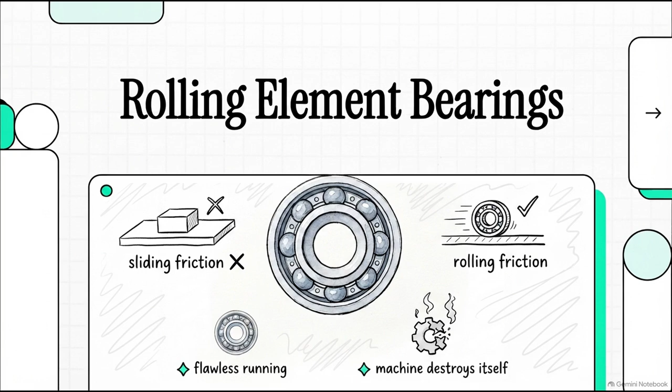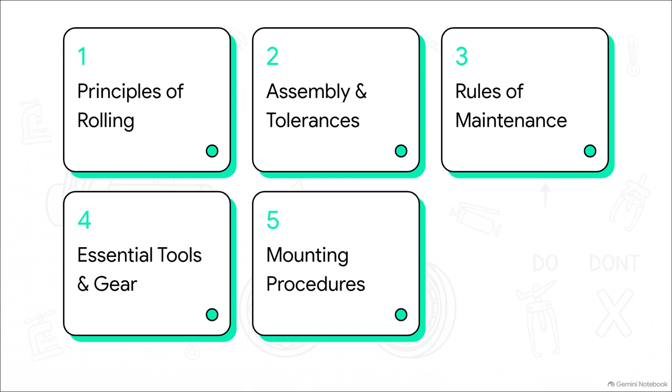Here's our roadmap for the session. We're going to breeze through the principles of rolling contact, move on to assembly design and tolerances, hit the strict rules of maintenance, look at essential tools and gear, and wrap it all up with precision mounting procedures.

Section 1. Principles of rolling contact. Let's look at the core concept here, swapping out that old sliding action for rolling elements. Now, unlike sliding mechanisms, these bearings stick a series of rolling elements, your balls or rollers, right between two moving surfaces. And because we're rolling instead of sliding, the material requirements completely change. The elements and the raceways they travel in absolutely must be made of specially hardened steel. Why? Well, the harder the elements, the less the surface deforms, which drastically cuts down frictional resistance.

But here's the real kicker. That hardened steel is crucial because the actual contact areas are incredibly tiny. I mean, think about it. With ball bearings, all those forces are concentrated on a microscopic point of contact. With roller bearings, it's focused along a very thin line. And because that load is squashed into such a minuscule space, the lubricant that gets dragged into the contact area is put under immensely high pressure. Surprisingly, this actually forces the viscosity of the lubricant to spike, massively increasing its load-carrying capacity exactly when and where it's needed most.

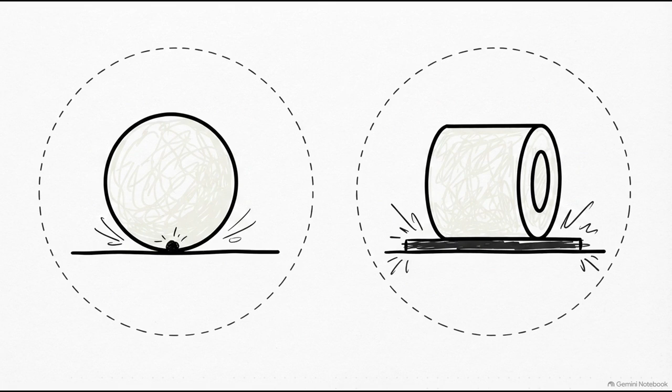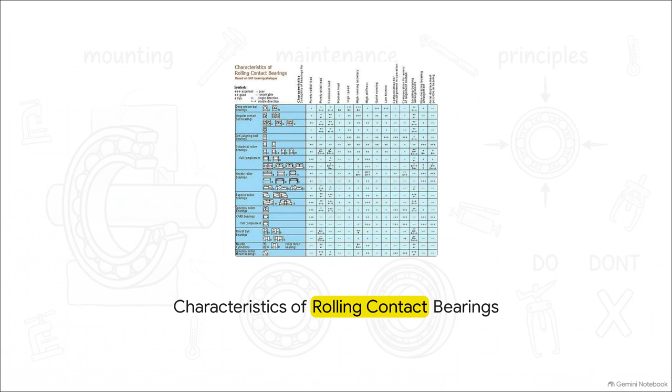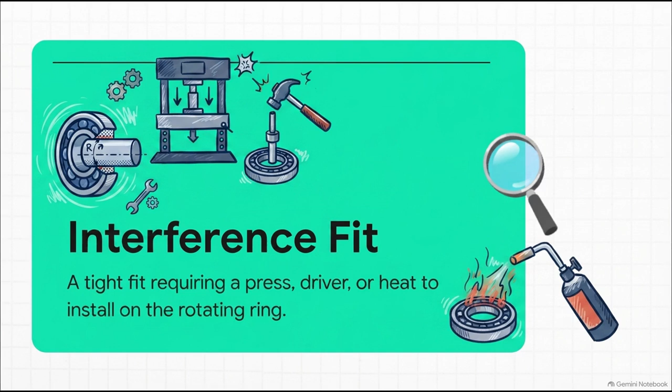Moving on to Section 2, Assembly Design and Tolerances. So how on earth do we keep a bearing perfectly locked onto a spinning shaft without completely crushing it? The main trick we use to secure a bearing is an interference fit. And let me tell you, this is a seriously tight fit. You can't just push it on by hand. You're going to need a press, a driver, or some thermal expansion through heating to get it installed. As a golden rule in mechanical design, the rotating ring of the bearing, which is usually the inner ring on the shaft, gets this interference fit. This ensures it stays completely locked in place while it's spinning under heavy load.

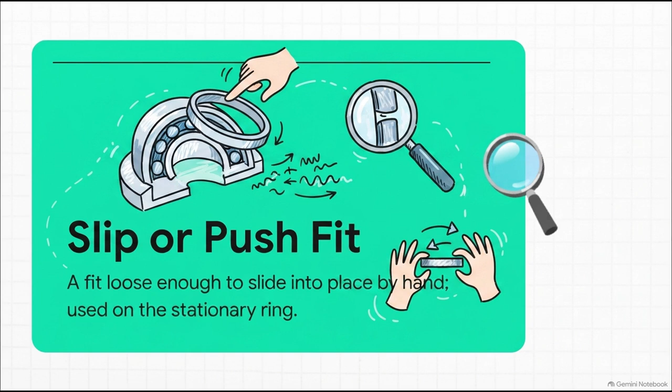On the flip side, we have the slip or push fit. Just like it sounds, this fit is loose enough that you can literally just slide it into place with your hands. We typically use this on the stationary ring of the bearing, which is mostly the outer ring sitting inside the housing. Not only does this make assembly way easier, but crucially, it allows the bearing to make those tiny, microscopic adjustments during operation. And that floating setup solves a massive real-world physics headache: thermal expansion.

Look, when machines run, they get hot. And when metal gets hot, it expands. If you've got a rotating shaft held by two bearings and both of them are locked down completely tight, well, the thermal expansion of the shaft is going to physically crush those bearings. No way around it. So the assembly has to be designed with one bearing securely held in its housing, whilst the other is left floating as a non-locating bearing. That way, it can move just a fraction to absorb all that axial growth.

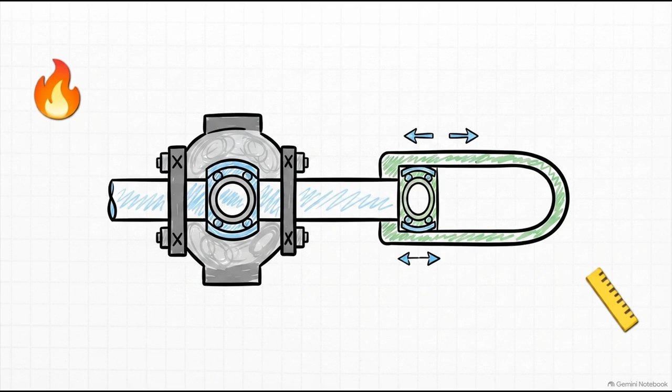To keep everything in its exact axial position on the shaft, we rely on some specific mechanical locking devices. The most common setup you'll see for both single and double row radial bearings is a specially designed shaft nut paired up with a locking tab washer. Now, for parts like the inner cones of tapered roller bearings, you'll often spot a slotted or castle nut secured with a split pin. Basically, these devices are there to guarantee that all the vibration and rotation doesn't cause the bearing to just wander out of position.

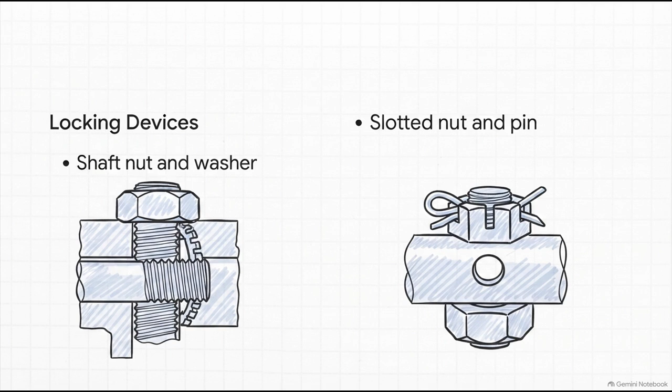Okay, Section 3. Strict rules of maintenance, because, let's be honest, all that brilliant engineering we just talked about can be entirely ruined by one simple human error. When you are handling rolling element bearings, you genuinely need to adopt a surgical level of cleanliness. We're talking completely free of dust and dirt particles at all times. You've got to handle them with strictly clean, dry hands or fresh gloves. Not using them right away? Wrap them up in oil-proof paper. And please, don't use dirty cotton waste to clean them. Stick to clean solvents and lint-free rags.

Oh, and here's perhaps the most common fatal mistake. Never ever spin a dry, unlubricated bearing with compressed air. Doing that can cause instant scoring. You'll literally ruin the component before it even makes it onto the machine.

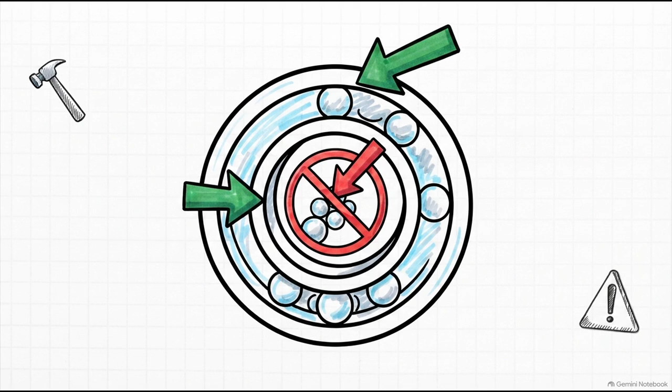This brings us to a massive, absolute rule. We call it the force rule. Whenever you're mounting or dismounting a bearing, the physical force must always be applied to the ring with the interference fit. Never, under any circumstances, apply force in a way that transmits through the balls or rollers themselves.

If you smack a bearing directly with a hammer or force the outer ring to try and push the inner ring onto a tight shaft, those rolling elements will physically indent the hardened steel raceways. It's irreversible damage. Game over.

Right. Section 4. Essential tools and gear. Because of that strict force rule we just discussed, raw human power just isn't going to cut it. You absolutely need specialized mechanical gear to handle these components safely. For installation, an arbor press is heavily preferred. It gives you that brutal yet perfectly even and controlled force you need for tight fits.

For removal, bearing pullers like claw pullers are completely essential. Just make sure the claws of your pullers are free from burrs and kept in top condition so they grip smoothly. Oh, and you'll definitely need lifting gear and slings for the really large, heavy bearings, along with specialized hook and impact spanners for any adapter sleeve nuts.

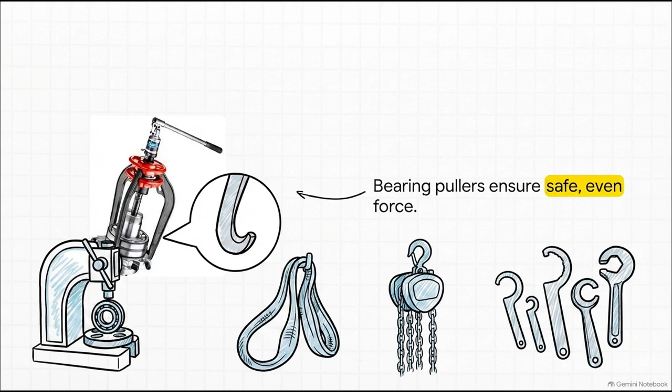Sometimes a fit is just too tight for a cold press, so we have to use thermal expansion. Now, traditionally, engineers used to dunk bearings in a hot oil bath. But these days, modern induction heaters are the gold standard. They use electromagnetic induction to heat the metal super rapidly. They're massively cleaner, way easier to use, and they completely eliminate the risk of contaminating your pristine bearing with dirty oil before it even goes into the housing.

And finally, Section 5, Precision Mounting Procedures. This is where all the theory, the tolerances, and the specialized tools finally come together. For smaller bearings, so generally anything with a bore of 100 millimeters or less, we go with a cold mounting procedure. Step 1 is always a meticulous inspection of the housing and shaft. You're looking for absolutely any burrs, nicks, or scratches.

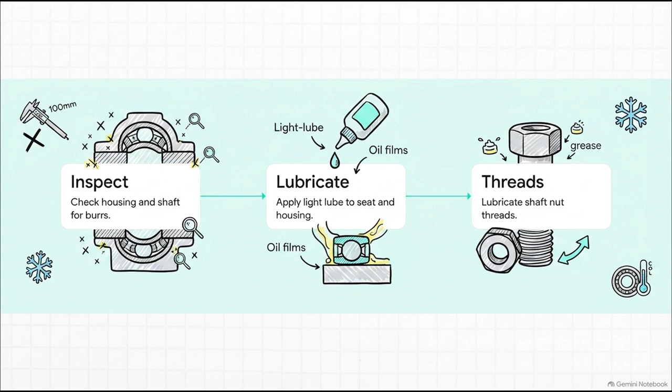Then you apply a really light lubrication to the bearing seat, the journal, and the housing. It makes the drive-up procedure so much easier. You should also lightly lubricate the threads of any shaft nuts to minimize resistance. And remember, all sealed and shielded bearings must be mounted cold, no exceptions.

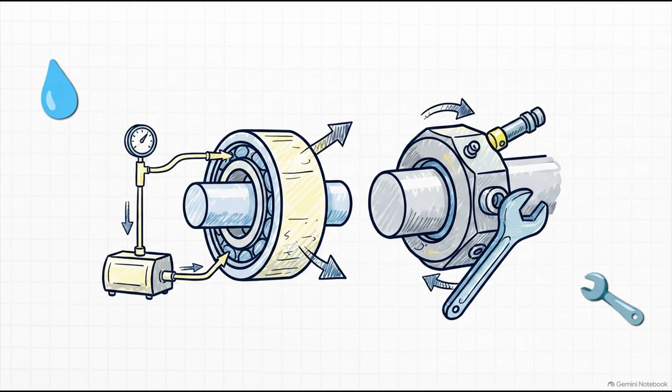But what happens when you're dealing with massive industrial bearings, especially ones on tapered bore shafts? Cold pressing with mechanical tools just isn't physically viable anymore. In these heavy-duty setups, engineers rely on oil injection combined with hydraulic nuts. Basically, this forces a micro-thin film of oil right between the mating surfaces, temporarily expanding that inner ring and drastically dropping the friction. That lets the hydraulic nut smoothly push the massive bearing into its precise position.

Now, for really tight cylindrical bores, or large tapered bearings where you aren't using oil injection, you have to hot mount them. By heating the bearing to roughly 80 to 90 degrees Celsius above the ambient temperature of the shaft, the internal bore of the bearing physically expands. This lets the engineer swiftly slide the hot bearing onto the shaft, and as it cools down, it shrinks right back to its normal size, locking into an incredibly tight interference fit.

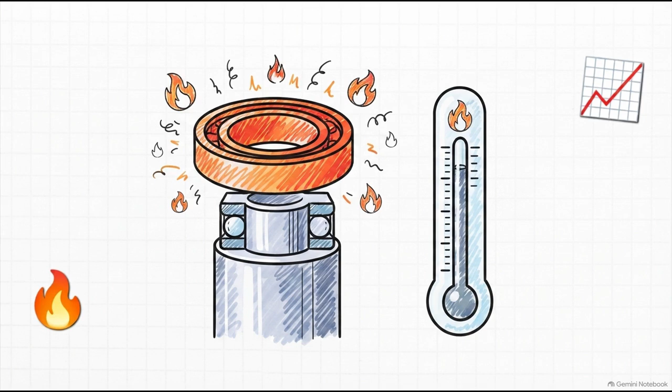But there is a hard physical limit to this thermal magic, and that magic number is 125. When hot mounting, you must never, ever heat the bearing to more than 125 degrees Celsius, which is about 260 degrees Fahrenheit. Pushing the temperature beyond this strict threshold actually alters the metallurgical properties of that specially hardened steel. You'll destroy its load-carrying capacity and completely ruin the bearing before it's even managed a single rotation.

So think about it. You've selected the perfect bearing, you've respected the tolerances, maintained surgical cleanliness, and executed a flawless mount without exceeding any thermal limits. But honestly, the true test is just beginning. Because once that machine fires up and starts spinning, immense dynamic loads take over. Will you be able to recognize the subtle, invisible symptoms of an impending failure before it brings the entire factory grinding to a halt?

Well, that dives into failure diagnostics, things like spotting a 10-degree temperature spike, or weird noise patterns, or diagnosing things like spalling and true brinelling. And that is a whole other beast we'll have to explore in our next explainer.